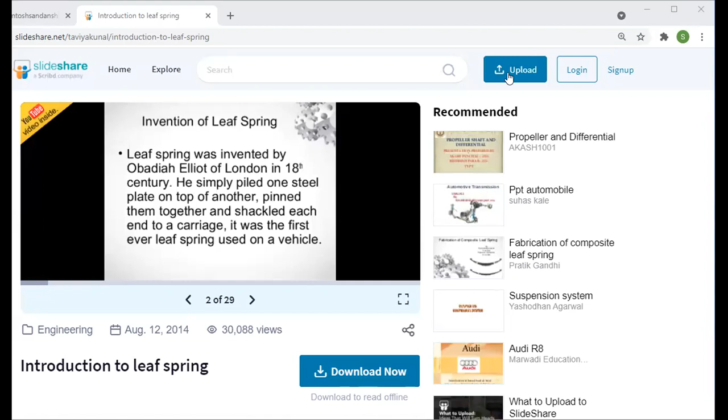Hello students, today's topic is related to leaf spring.

Leaf springs are also used in automobile industries. Nowadays it is mainly seen in trucks, tractors, and trailers.

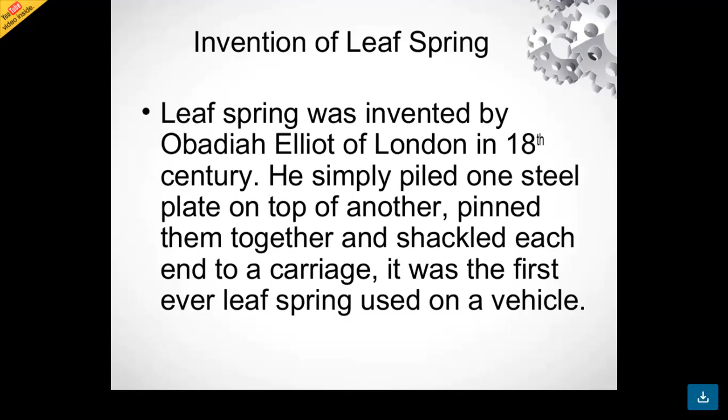If we see the history, the leaf spring was invented by Obadiah Elliot of London in the 18th century. He simply piled one steel plate on top of another, pinned these steel plates together, and shackled each end to the carriage. It was the first ever leaf spring used on a vehicle.

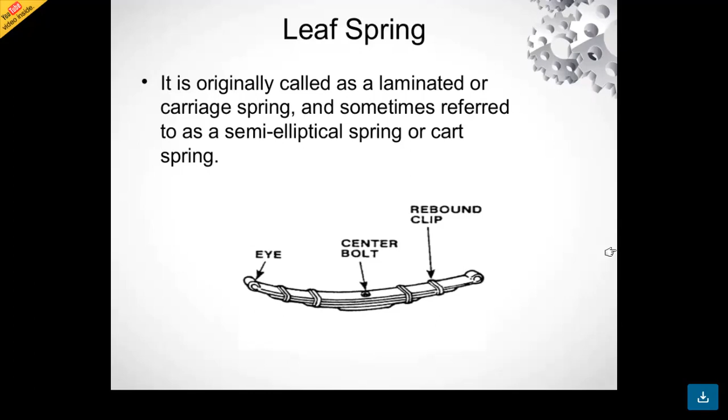It is originally called a laminated or carriage spring, and sometimes referred to as a semi-elliptical spring or cart spring. As the shape of this plate is elliptical, but not a complete ellipse - this is half of that, or part of that ellipse - it is called a semi-elliptical spring.

If we see the principle of the leaf spring, a leaf spring is a simple type of suspension spring which is commonly used in heavy-duty vehicles.

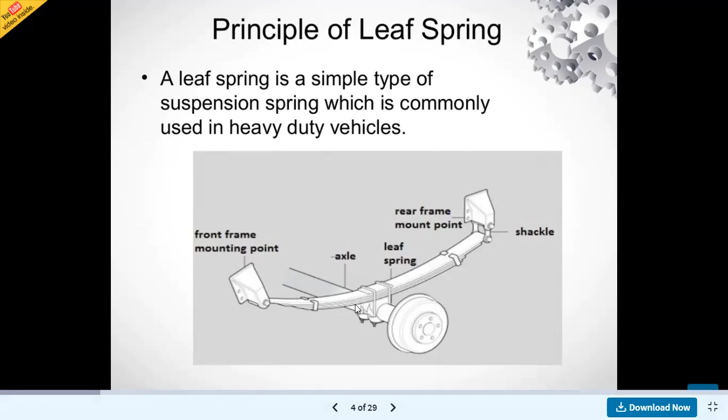This leaf spring is attached to the chassis frame. This is the front frame mounting point, and this is the rear frame mount point. Both these mountings are attached to the frame, and at this mounting point, the leaf spring is connected with the help of this shackle. If we observe here, this leaf spring is attached to the axle with the help of these U-shaped bolts. This is called the axle.

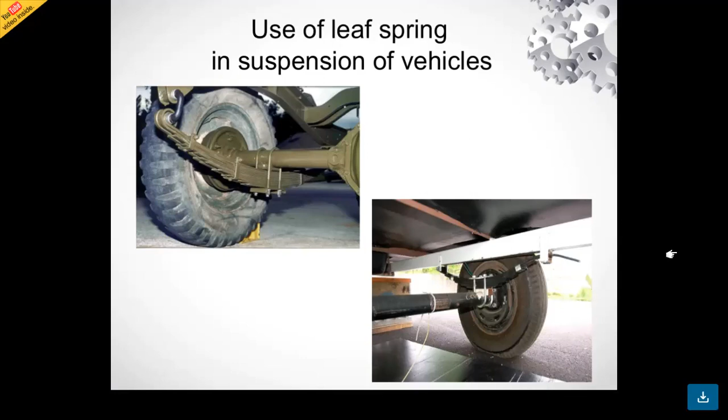If we see the application of leaf spring for the suspension of vehicles, these are the actual diagrams. This leaf spring is attached to the axle - in this case, it is connected from the bottom of the axle, and in this case, the leaf spring is connected on the upper end of the axle. So if we want to reduce ground clearance, we prefer the first diagram, and if we want more ground clearance, we prefer the second diagram.

If we see the layout of the leaf spring, in this case, this is the axle, part number 8 is the axle. Then this is the leaf spring, eye is provided, this is the shackle. This is the vehicle's left side and right side. There is no much difference in the springs - all these leaf springs are connected with the help of this U-bolt to the axle.

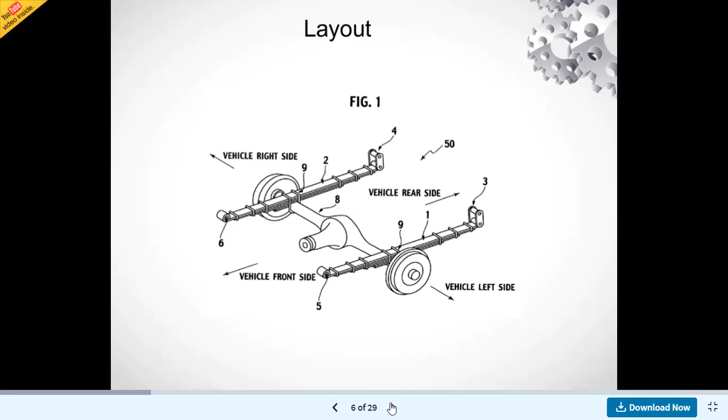If we see the types of leaf spring, in some situations, if we want more suspension or more damping with less vibrations, we prefer the elliptical type of mounting. In this elliptical type, the semi-elliptical springs, or two springs, are attached to each other, one over the other, forming an elliptical shape, so it is called an elliptical leaf spring. The semi-elliptical leaf spring we already discussed.

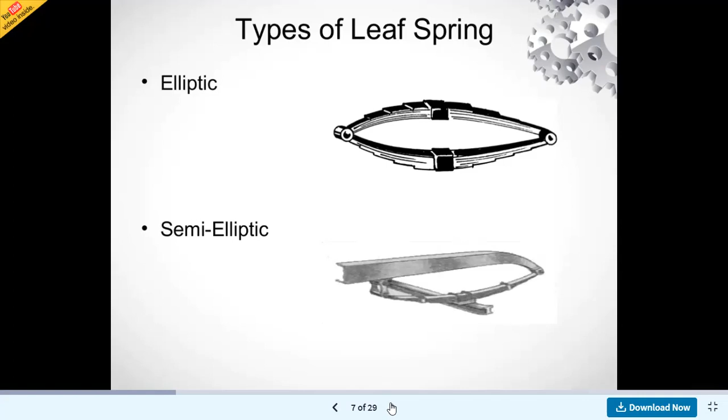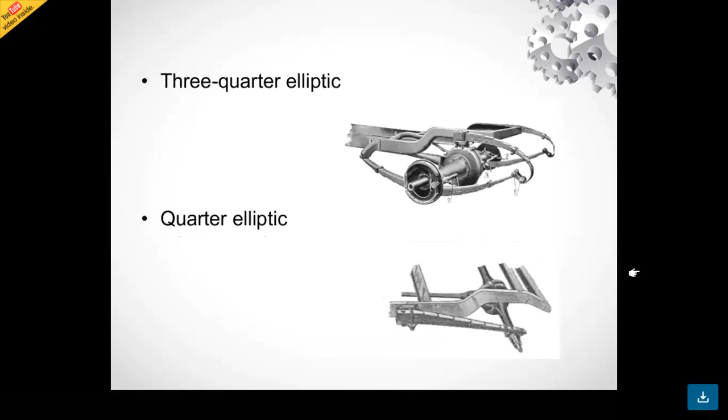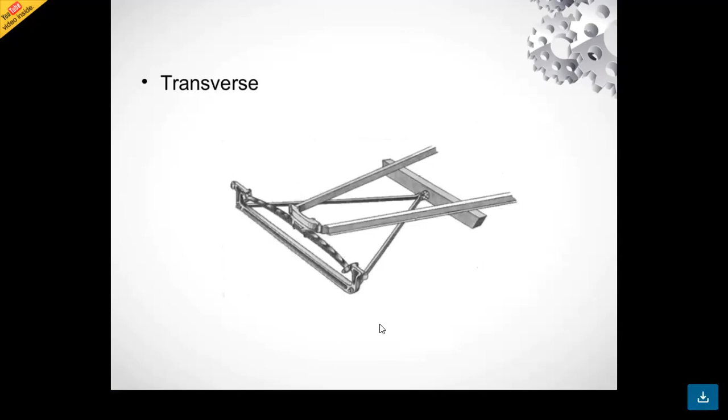If we see the next types of leaf springs: first is conventional leaf spring, second is eye mounted spring, third is taper ended slide spring, fourth is progressive spring, and fifth is trailer spring. In the conventional leaf spring, the plates are fewer in number, all connected with the U joint. Second is the case of...

eye mounted springs, where the eye is available on both sides of the spring - actually four eyes are available in this case. In the taper ended slide spring, taper is provided at the end of the arrangement. In the progressive spring, some plates are attached at the bottom of the spring. In trailer springs, if we observe the diagram, the plates are more in number, so it is called a trailer spring.

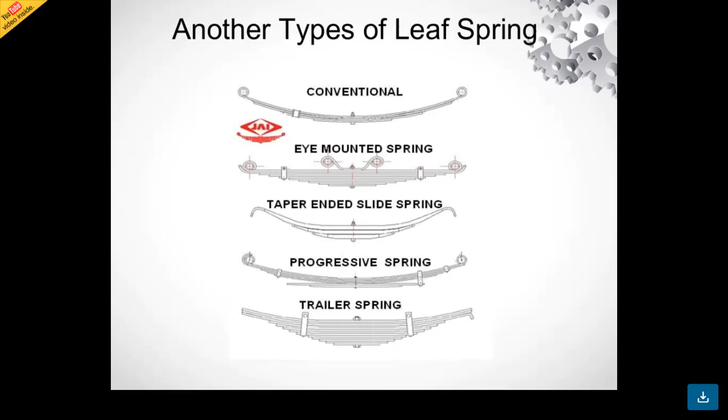Next is the double eye leaf spring. It measures mounting point to mounting point center in the second type, that is, measure mounting point to the furthest inside point.

If we observe here, the height of the eye and the plate center point, this height becomes B. This is open eye leaf spring. Next is hook end, flat end, and radius end springs.

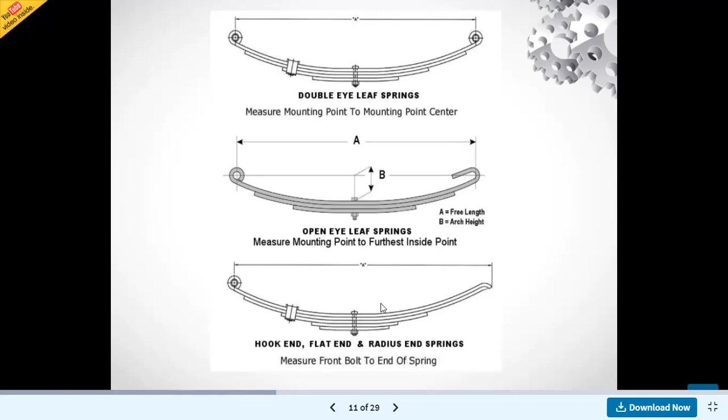Sometimes types are there, that is full taper spring. See here, eyes are shown at B and C point.

In case of multi-leaf spring, these plates are available. So this is E, then this is D, and this is C. All these are connected together by the use of U joint.

Then three leaf trailer spring. Leaf trailer springs are also available. Then next type is the E plate and D plate is also available. If we observe here the connections, all these plates are connected together with the help of this U type of joint.

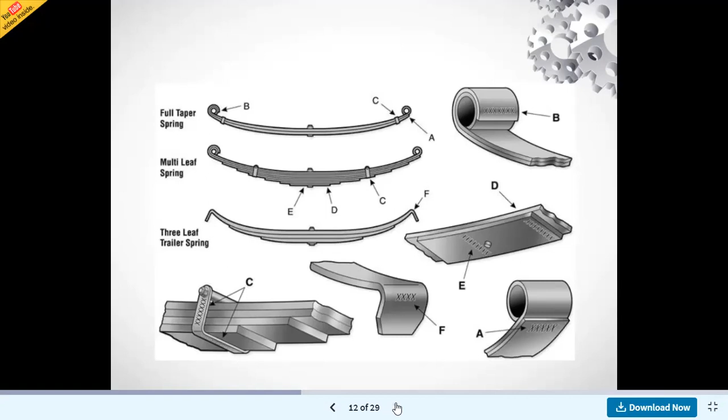If we see the different leaf springs used in different vehicles, heavy truck springs for Mercedes, Isuzu, Scania, MAN, Mack, Bedford - these are company names. In these companies, different types of leaf spring arrangements are available.

Then next is, if we consider trailers, they are again heavy vehicles. If we consider the arrangement in heavy vehicles, that is small trailer springs for box type trailers.

Rubery Owen, Frighter, Hendrickson, etc. If we see these names, then this type of arrangements are available.

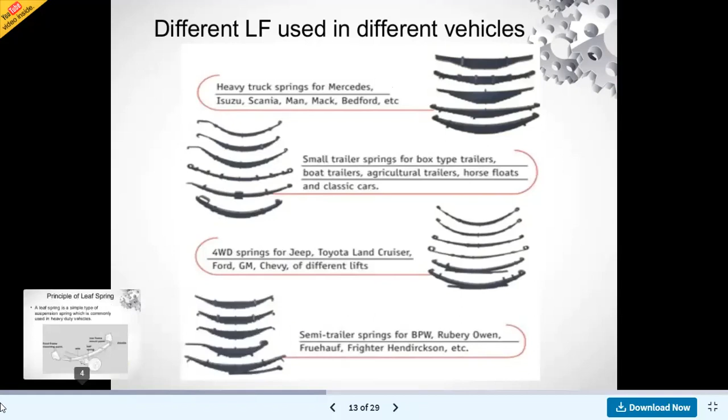If we see the construction of leaf springs used in automobiles, it is of semi-elliptical type. It is built up of number of plates known as leaves, which are reducing in length. The longest leaf is called the main leaf or master leaf, and other leaves are called graduated leaves.

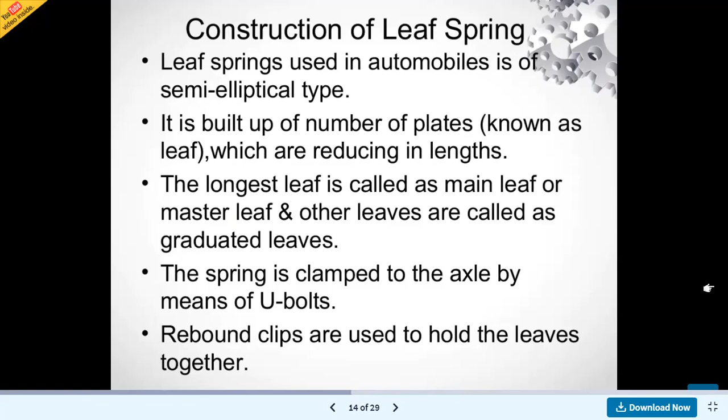The spring is clamped to the axle by means of U-bolts. Rebound clips are used to hold the leaves together. Central clamp is used to fix the position of leaf spring to the wheel axles.

If we see the characteristics of leaf springs, it acts as a linkage for holding the axle in position, and separate linkage is not necessary. It makes the construction of the suspension simple and strong.

As the position of the axle is carried out by the leaf spring, it makes it disadvantageous to use soft springs, that is springs with low spring constant. Therefore, this type of suspension does not provide good riding comfort.

The interleaf friction between the leaf springs affects the riding comfort. Acceleration and braking torque cause wind up and vibration. Also, wind up causes rear end squat and nose diving.

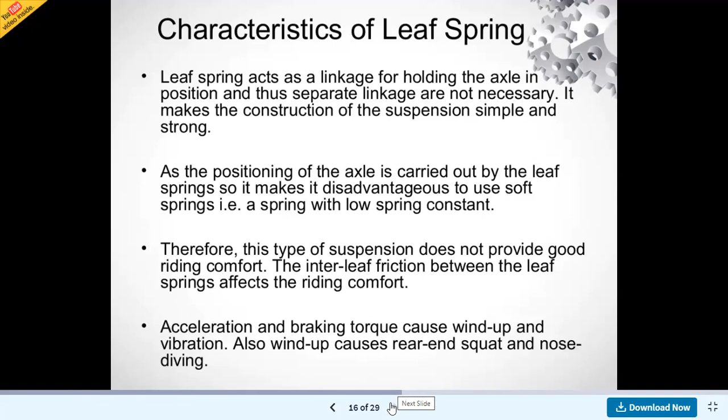If we see the manufacturing process, first take the flat bar, that is shearing of flat bar. Then second step is center hole punching, that is drilling. Drilling operation takes place in this second step.

Third step is end heating process forming, that is eye forming or wrapper forming. So in that plate, we make the plate circular at the ends, and in this way we create eyes.

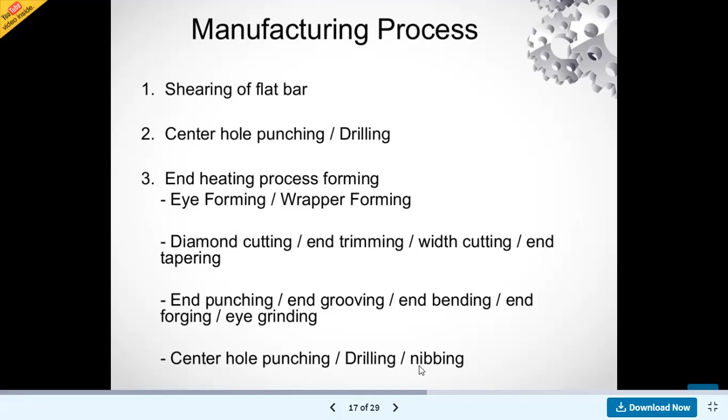Then diamond cutting, end trimming, width cutting, and end tapering operations are done. Then end punching, end grooving, end bending, and forging or eye grinding - all these operations are done on this leaf spring manufacturing. Center hole punching or drilling or nibbing are again another processes.

If we see the next step, that is heat treatment. After cutting all these plates and arranging and making the eye bolts, the next step is heat treatment. First step is heating, then chamber forming, then hardening process, quenching process, and tempering process. All these processes are related to metallurgy or material science.

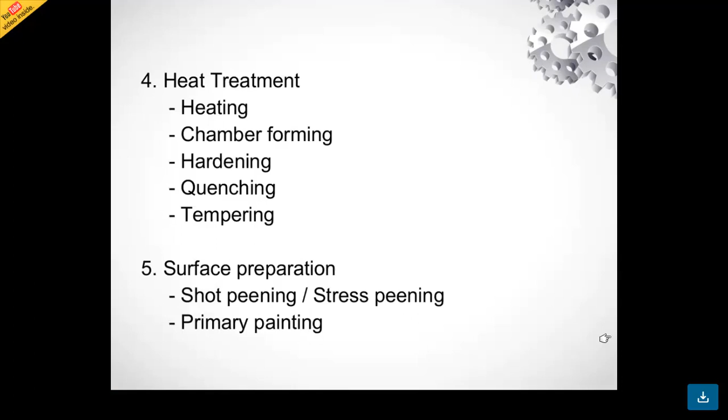Next is surface preparation, shot peening and stress peening. These are the operations done in surface preparation. Primary painting is another one.

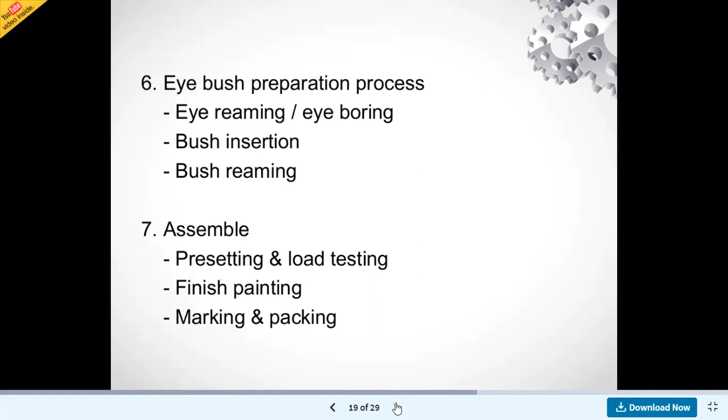Next step becomes eye bush preparation process - eye reaming or eye boring, bush insertion and bush reaming. These are the next operations in the manufacturing process. Next step is assembly, presetting and load testing, finish painting, marking and packing. All these are related to the manufacturing process.

If we see the next standard sizes of leaf spring, the width varies from 25 mm to 80 mm in steps of 5 mm. And the thickness of these leaf springs varies from 2 mm to 8 mm in steps of 1 mm, that is 2, 3, 4, 5, 6, 7, 8 mm. All these ranges are available.

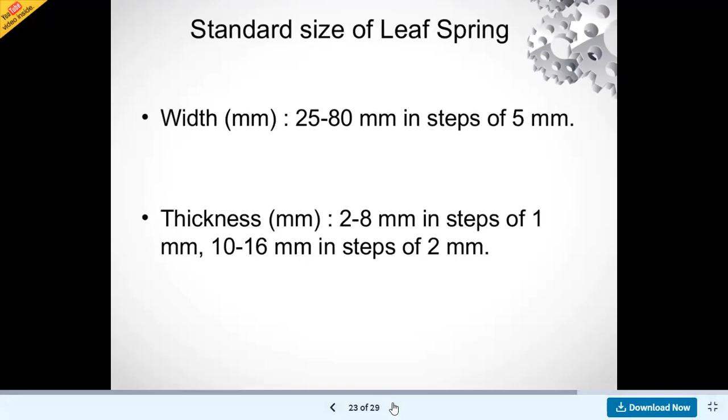If we consider 10 to 16 millimeter, it's in steps of 2 mm. And if we see the materials used for leaf spring, the material used is usually plain carbon steel having 0.90 to 1.0% carbon.

According to Indian standards, the recommended materials are 50Cr1, 50Cr1V23, 55Si2Mn90, which is used in hardened and tempered state. So in this way, we finish this material also. So these are some topics related to leaf springs. So today we stop here. Thank you.